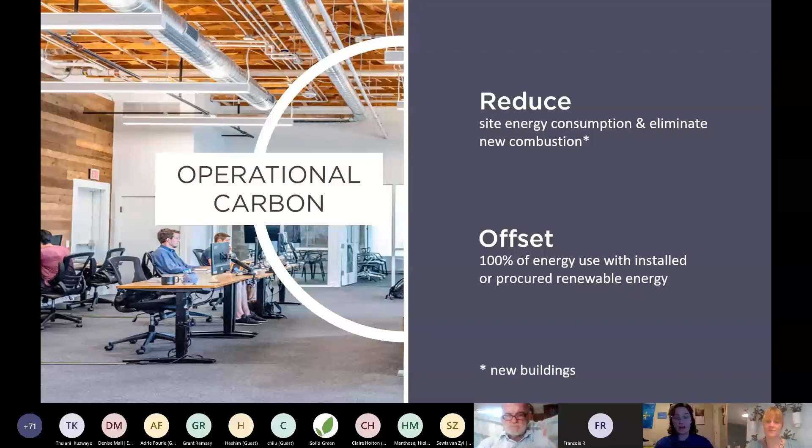And then offsetting, you'll note 100% of energy use with installed renewable energy, so either on or off site. That's a little bit different than LBC as well, because you can look beyond the site of your flower. And then on the embodied side, very similar, reduction in those heavy structural materials. You have to tell us what the total carbon intensity of your project is.

So that is kilograms of CO2 per square meter of your project, because that's a really important metric that we're using to study the impacts of different building types and programming. And then offsetting that with either carbon sequestering materials and/or purchasing carbon offsets.

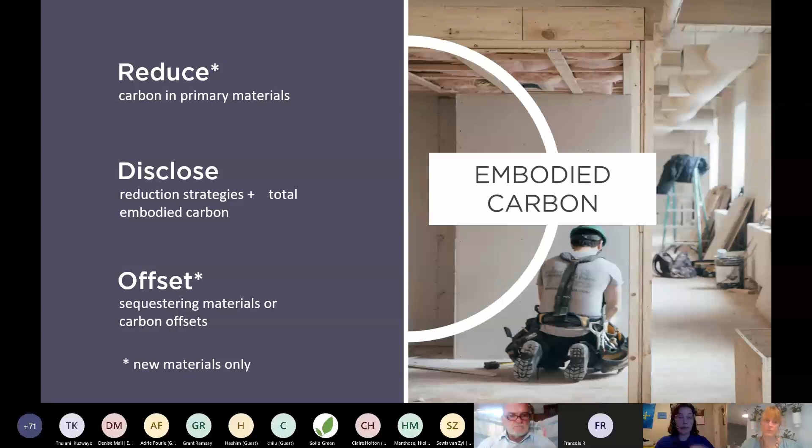Lastly, we have our zero energy program. And this one is very simple. The only requirement here is that you need to be zero energy. We created a really streamlined program for teams who wanted to show that their site energy consumption is equivalent to their on-site renewable generation. So this is also the 100% pathway.

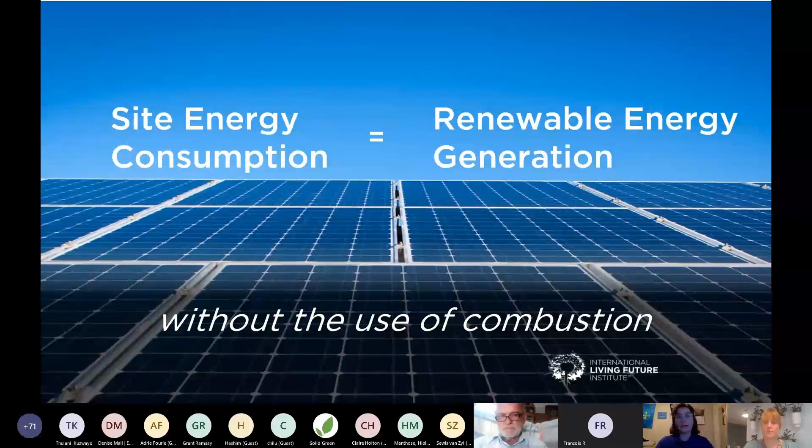So there's no extra buffer there like there is with LBC. And again, without the use of combustion. We're pretty strict with zero energy teams not using combustion, because again, that's a really important part about showing that you can operate fully off of renewable energy.

How the programs interact with each other and overlap is that we saw with net zero, LBC is very net positive, so it goes above and beyond net zero. And so within net zero, zero carbon, you have a little bit more flexibility about being on or off site. Combustion: LBC and zero energy are pretty strict, but there are some pathways within zero carbon. And then for embodied carbon, there's nothing about it in zero energy, but LBC and zero carbon are pretty strict, or pretty inclusive about that.

So now I'm just going to wrap up with a couple of case studies that we really like to share. So unfortunately, the two projects I'm talking about today are in the United States, which means that I need more people like you to do really awesome things in South Africa so that I can have more interesting international projects to talk about. But these are both really cool. I promise they won't disappoint.

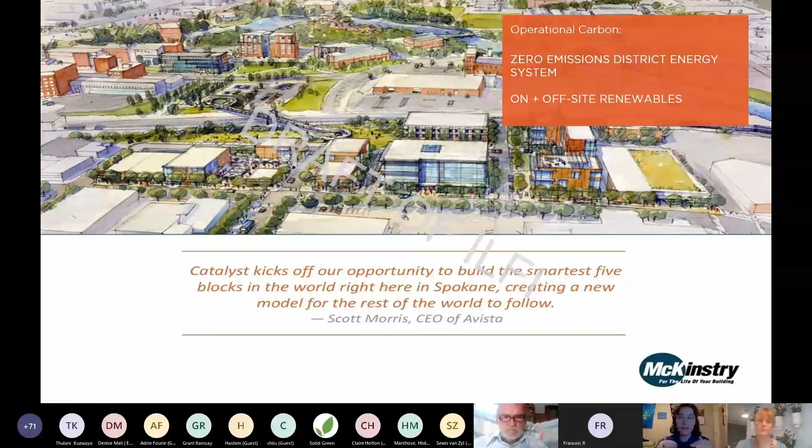So the first project is called Catalyst, and this is a project that's located a little bit east of where I am right now in Eastern Washington. This project is institutional, so it's associated with a few universities that are in the area. And from an operational carbon side, they're actually on a zero emissions district energy system. So they are basically on a fully clean grid that they contribute renewable energy to. And they have some on-site energy on their roof, and then they're also procuring or installing additional off-site solar very near to their site.

And then from an embodied carbon perspective, it's a cross-laminated timber building, which is becoming all the rage in North America. There's a lot of CLT projects happening because we're starting to look really intensely at the impacts of wood and figure out, not all wood is good wood, but figuring out how to use that as a carbon sink within buildings. So they use CLT. They also procured this wood from a local manufacturer, so they really had good interaction with their supply chain and really understood the impacts of the products they were using.

So if you're interested in learning more, a big academic research body we work a lot with is the Carbon Leadership Forum, based out of the University of Washington. They partnered with Katerra, who's the lumber supplier, and they did a full life cycle assessment of this Catalyst building. So that's available on CLF's website if you're interested in learning more.

And then the next case study is called 303 Battery, and this is a multifamily residential project, also here in Washington, about 2 miles, 3 kilometers from where I am currently. So it's right outside of downtown Seattle. This project is really cool for a lot of reasons. They're pursuing the Living Building Challenge Energy Petal, along with zero carbon on a volume scale, which means that they're looking across their portfolio to understand how they can apply these design strategies and set themselves up for certification across a number of different projects. So Sustainable Living Innovations are the masterminds behind this, and this project is extremely energy efficient.

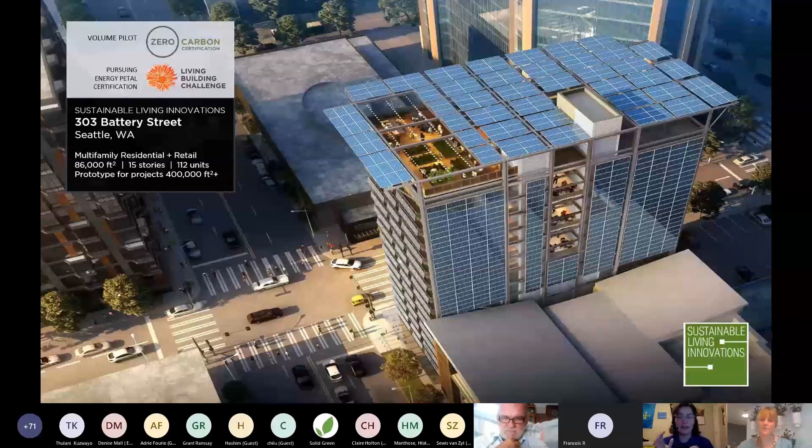And from an embodied carbon perspective, when SLI was created out of another architecture firm in the United States, they asked themselves, how can we build a building that you can construct faster and cheaper, which I feel everyone has probably asked themselves before. And their answer was panelized construction.

So they assemble all of these things offsite in a warehouse and then transport the blocks basically on site and then construct it in a much shorter amount of time, which obviously reduces construction time and waste because it's in a controlled environment. They design everything very meticulously to what they need. This also results in a much lighter project again.

It's about 80% lighter than an equivalent building of its typology, which is really crazy to think about, all of that material that they're not using because of their efficient design and innovative thinking. And they also own or participate in every part of their supply chain, which means that, yes, they've achieved these really impressive reductions from this different design, but they can also iteratively go back and look at every step of their supply chain and reduce the impacts from there as they progress.

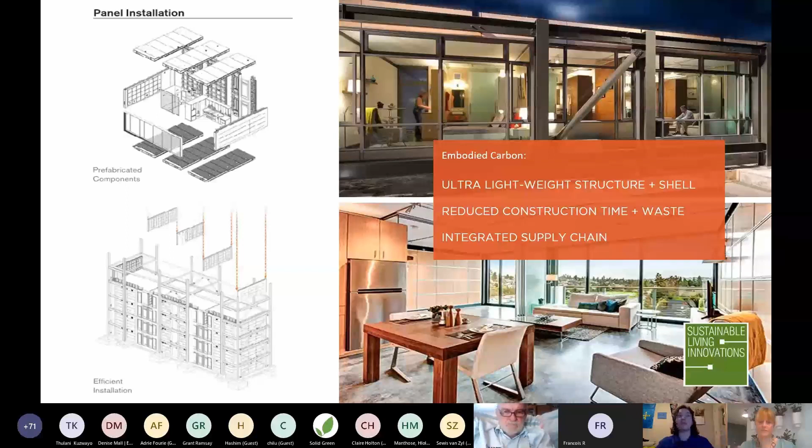And any case studies that have been certified, so these are both projects, the two that I talked about today are pursuing certification. So any of the ones that have been published and have gone through a year of a performance period, since we're outcome-based, are posted on our website there. We have a lot of zero energy case studies available for you to explore there.

And then, like I mentioned, we have our LBC 4.0 standard available, and then our petal handbooks that we just released and updated a couple weeks ago, which is very exciting. I'm most excited personally because I got to work on this: we just released our zero carbon handbook a couple of weeks ago. So this gives project teams in-depth guidance about how to meet those requirements that we talked about today for zero carbon.

And there's a lot of buzz happening with ZC that we're working with right now. Again, it's what I spend most of my time on. And so we're really excited to get that resource out for teams. The standard is available on our website, and then the handbook is available for members through their dashboard.

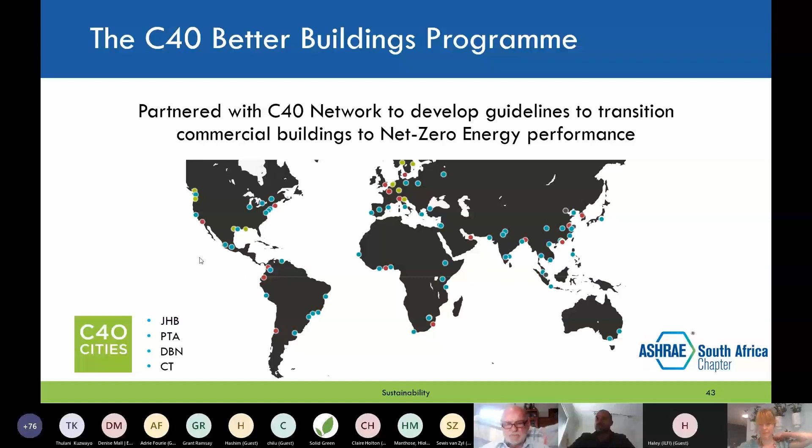Okay, so touching on how do we get there? How do we get to net zero carbon in the South African context? First, I thought I'd talk about a few success factors that come from the ASHRAE Advanced Energy Design Guide for buildings. Number one, I think, is extremely important, is developing culture and mindset in your team for delivering a net zero project. It's that old thing of visualize, manifest. If your team can see this and believe it, they can create it. But if you've got a team that is reluctantly pursuing this, you're kind of doomed from the start. So really important is to create that culture and mindset around it.

And then that team needs to work together. So don't call me up as a developer and say, I need a net zero building. Can you do it for me? Because I can't. And neither can any of the other sustainability consultants out there. It's about having a team deliver this. So every member of the team needs to collaborate to achieving the targets, and it's an iterative process. We'll do concept designs, we'll test them against targets, we'll go back through each stage of the design and refine that. So it has to be collaborative, it has to be iterative.

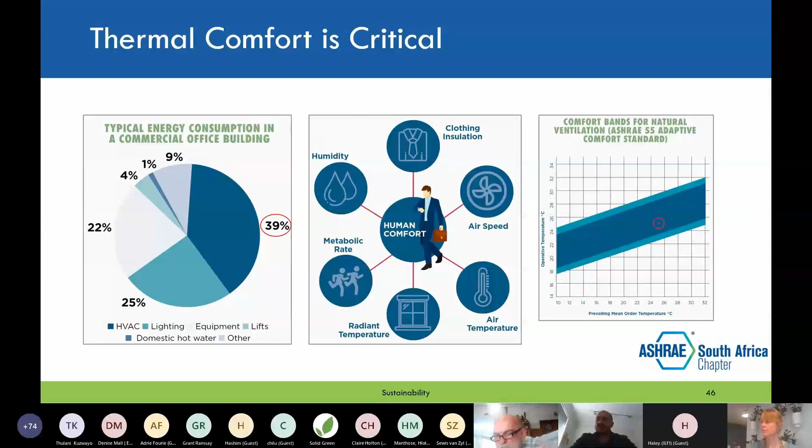Yeah. Touching on from thermal comfort, one of the tools we use to do this is building simulations. And I mentioned that iterative design process where we kind of work collaboratively, test our results, work collaboratively again. Building simulations, if used correctly, can be the central tool that allows us to test those issues. So it allows us not only to model our energy consumption, but it allows us to test things like shading devices, glazing, natural ventilation. We can test these in order to design buildings that are comfortable without air conditioning first. And then in those times where we can't meet comfort, sure, there may be an air conditioning supplement. So that's the goal here, really.

Where, to be honest, at the moment, we design our buildings, and then we design the air conditioning to meet whatever that design is. And very few projects in South Africa have managed to really move into this iterative space of using simulations to inform excellent design. And if we're going to move to net zero, we need to all move in this direction. It can also be useful for daylighting, for glare, not only thermal comfort.

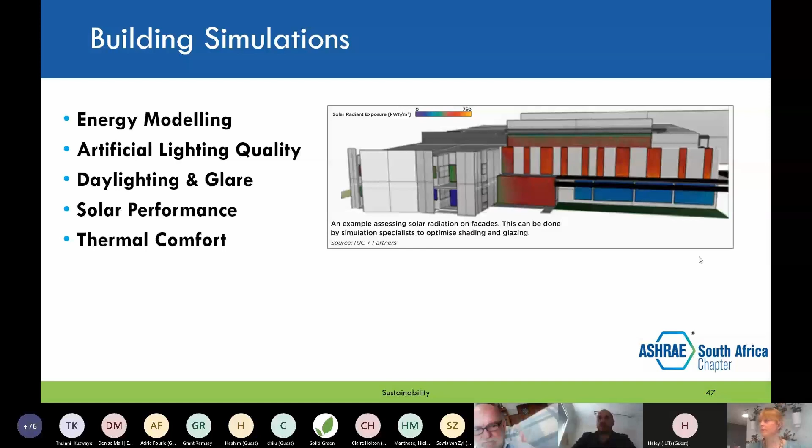So moving ahead, another useful tool. So we've spoken about the ASHRAE 55 standard, and there's a number of other ASHRAE standards out there relating to simulations, relating to thermal comfort. And then we've spoken about simulations and those tools. So the question is, can we achieve buildings that are comfortable in the South African context?

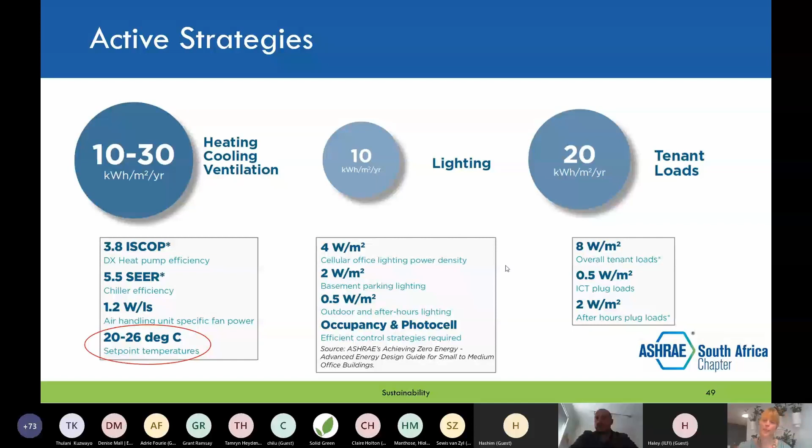Similarly with lighting, we first go through the exercise of maximizing daylight, maximizing natural light in buildings, and then we apply the most efficient technology. Lastly, we look at plug loads and work with tenants through mechanisms like a green lease, for example, or through fit-out criteria. We can keep the plug loads as low as we can as well.

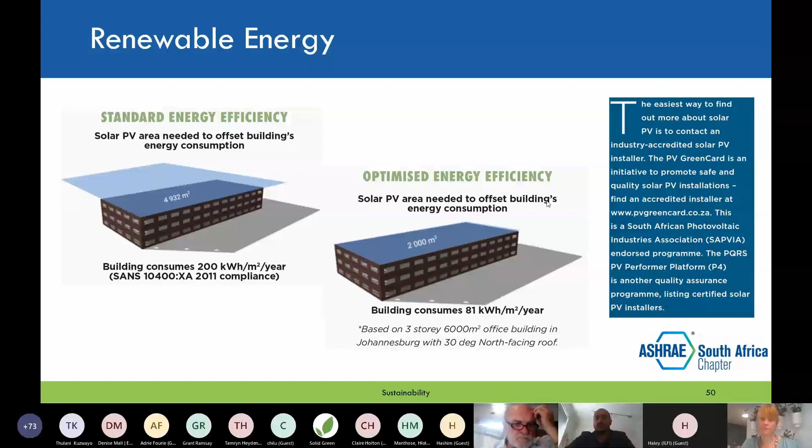Okay, so that's really me for this presentation. But in conclusion, just a reminder of a couple of the points we want to get across. The one is that net zero energy buildings are possible, and not only that, are necessary, but we have to drastically push to lower our energy consumption first. We have to push for comfortable buildings that reduce the reliance on energy-intensive air conditioning. And then once we're done with that, the technology's there and ready and affordable, and we can supplement the rest.

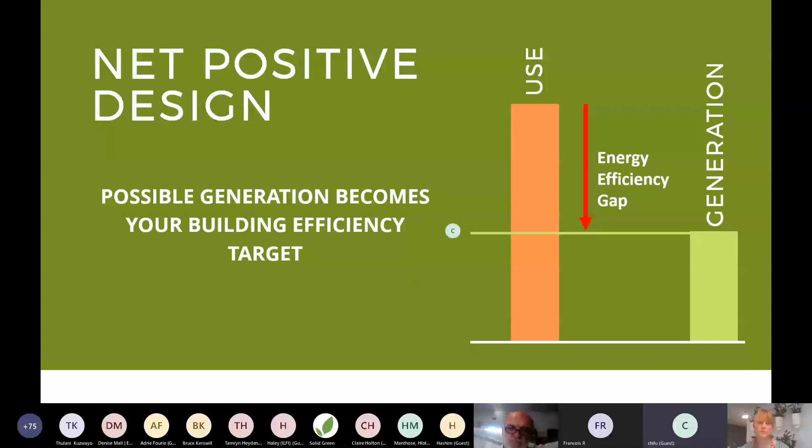And to get an idea of this energy efficiency gap, I think people kind of understand that, yes, maybe the buildings are not that efficient, but how much more efficient than the building that we know do we have to be? So this graph is indicative. There are no numbers on this because it's just meant to be a visual representation of just how efficient your building needs to be.

Net positive or net zero carbon buildings are about energy efficiency. They're not about your eventual offset. If you went through this whole process and eventually didn't do the offset, you would still end up with the most energy efficient building that you've ever worked on.

What we often say to people at the beginning of projects is that if you work on your first net zero or net positive building and something doesn't happen that makes you uncomfortable, then you're probably not on the right track, because everything that's in there has to be things that we've all never done before.

A lot of what we'll be talking about now is just the reality of net positive energy buildings as per our experience. It is still fairly limited in comparison to the overall number of buildings. This represents the smallest amount of the work that we have, but it's of course the most challenging and the most interesting. We've got 3 buildings that we're working on that are aiming to be net positive. They're quite different. One is an office block, one is a residential home in Cape Town, and one is a hotel.

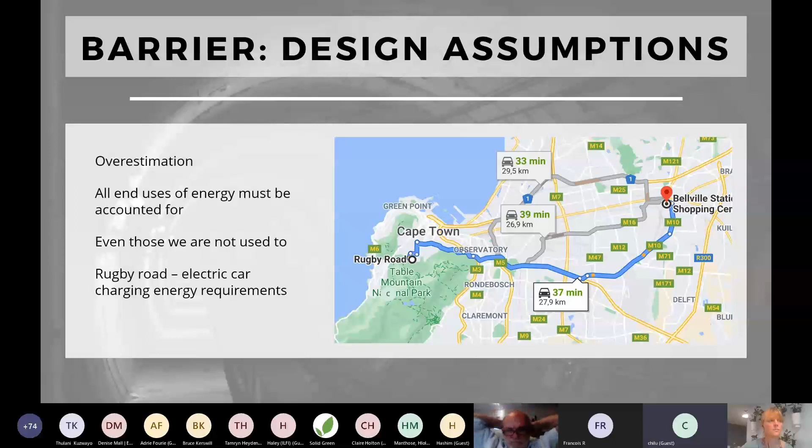So once you're trying to account for every single piece of energy within any type of building, there's going to be a lot of this, because you have to make assumptions upfront and see how they carry through. And this is why within the Living Building Challenge, there's a lot of emphasis on data and monitoring your usage, because once you start to see how buildings operate, that's the best input into design, where you can see what actually happened in certain places.

So when we're talking about buildings that are 3 to 4 times more energy efficient than before, what are we really looking at in terms of what we need to optimize and reduce? And if we look at buildings over the last sort of 20 to 30 years, there's some aspects of buildings that have just naturally policed themselves. So lights have just become more and more efficient. You can't not get an LED light in a new building. A lot of equipment, Energy Star, people use laptops. A lot of those have generally just been decreasing.

Air conditioning, on the other hand, as a technology, has not advanced very far in the last 30 years, because the principles are still the same. The equipment might be slightly different, and there might be slight changes in efficiency, but in general, we cool with air. We've been cooling with air for the last 40 years, even though science tells us that's not the best way to keep a human being comfortable. That, coupled with the way we design buildings nowadays, means that whatever advances have happened in the technology, the design of buildings is such that the impact of heating and cooling hasn't changed that much over the years.

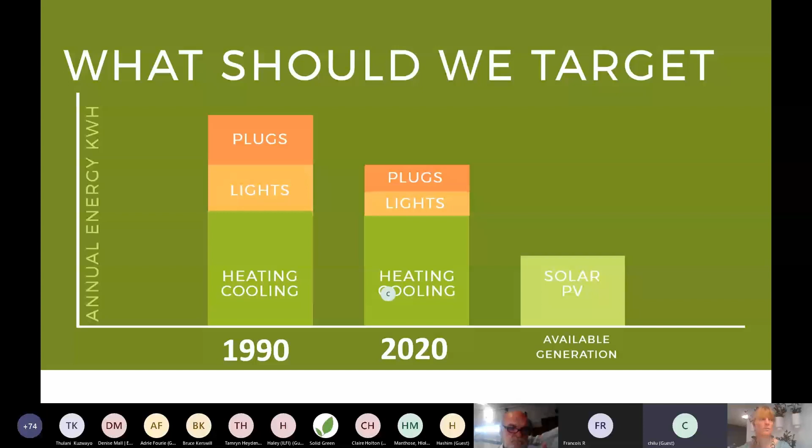So the biggest design impact for net positive buildings is how many hours a year can your building run without your air conditioning? And it's a little bit different to thinking about it from a natural ventilation perspective, where you say, this is what the climate allows you to do. So if you're working on a building right now and you had to run a simulation and say, if at 12 o'clock, when it's 23 degrees outside, your air conditioning broke, how long would it take before it was 30 degrees inside and you had to evacuate everyone? And that's the biggest design impact.

So we're trying to get this going as a metric that we use to evaluate buildings, which is designed without air conditioning, and look at, even if you do have a system, can it be off? Because the only way you can make this type of impact over a building's energy use is by having hours where your air conditioning is off. You know, the best efficiency is off. People often will look at a building and say, well, what technology is in there? And you have to look at what is the actual requirement. So a key takeaway from this would be just that. Can you survive in your building without air conditioning, and for how long?

So that goes into the topic of aligning with natural forces. So here we're living in Africa, where we know that we have this amazing resource in the sun in terms of just how much energy intensity we get. But the fact that our energy intensity is 40 to 50% higher than anywhere else in the world means that the architecture and the way that we design our buildings has to be suited.

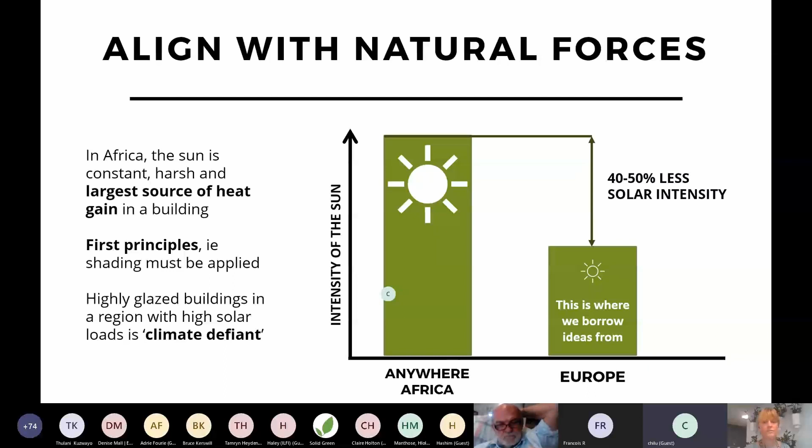And a lot of times, if you take a drive around a lot of the central business district areas across almost any city in South Africa, you can see the type of buildings that are very climate defiant. They're not suited for where they are, where we know we've got high solar gains, and we have these buildings that are incredibly highly glazed, and we also have buildings which are even more incredibly budget conscious. So all of it comes into a scenario where we are completely defiant with the climate that we have. So this is the first aspect of aligning with natural forces. We need to design for the climate that we are in. And the first one, doesn't matter where you are in Africa, solar intensity is very, very high.

So these are two images of the two buildings that have a good example of this. So the one on the left is 76 Corlett. It's a building that's well shaded. It actually defies a lot of what we would understand around sustainable buildings, in that it's oriented east-west. And what we always say is that there's no real wrong orientation if you provide the mitigation.

So if you design your building to account for the fact that it's oriented in a way that's less than ideal, what there is, is that there are facades that are more difficult to shade than others. So that's why you talk about north-south, because it's very easy to shade those. East-west is difficult to shade, but it's not impossible. The Hotel Nieu on the right-hand side is the same. It's a good example of designing for the climate that we have here, protecting the facades against direct sunlight.

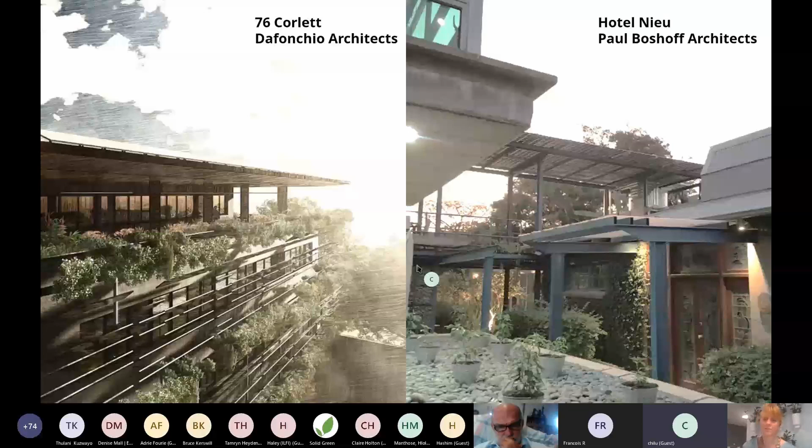And then the second aspect of aligning with natural forces is looking at what is the outdoor condition. The bulk of South Africa actually has what we would consider mild climates statistically. So, for example, the average temperature in Johannesburg is 17 degrees, which means across the whole year, you need heating more than you need cooling. But we always say that it's a cooling-dominated area, and that's only because of the way that we design.

So if your building is in a mild climate, you should take advantage of prevailing conditions to run buildings at a minimum just based on what you need for ventilation. And not forgetting that it actually does get cold. Even though we're in Africa, a lot of times we build buildings forgetting that it gets cold.

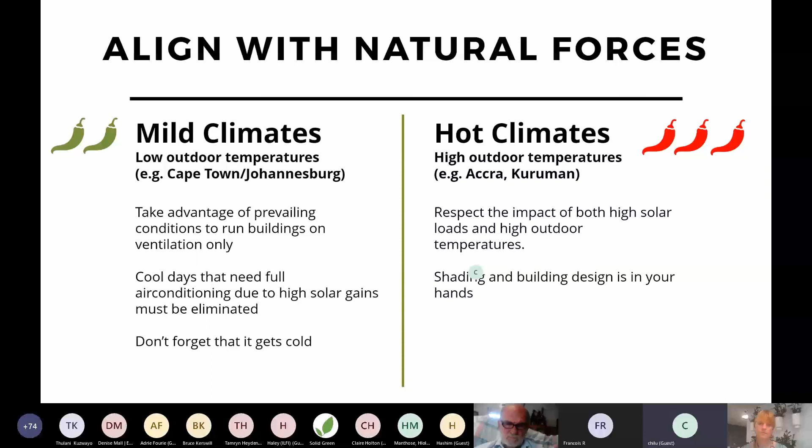And then when you're in a hot climate, you have to respect the fact that the combination of hot outdoor plus high solar gain means a lot of energy to keep buildings comfortable. So it's even more imperative that you shade the building and you make sure that you design correctly. As much as the climate is not something that we can control, the shading in the building design is definitely something that can be controlled.

When you are in a very mild climate and you've got outdoor temperature that makes it possible for you to cool the building, one of the constraints is that the air conditioning, which is providing cooling, and the ventilation system are often mixing and working together. So if you decouple this, which means you can have your cooling off but have your fresh air working, then you can provide comfort, you can provide a source of cooling without running the big equipment, your compressors and that sort of thing.

And that's the 82% in a climate like Johannesburg that Francois was talking about: if you can get air from outside into the building reliably for 82% of the time, you won't need your big air conditioning devices.

Malus helped me with these slides, and I'm thoroughly impressed with this fresh air fan that's actually rotating.

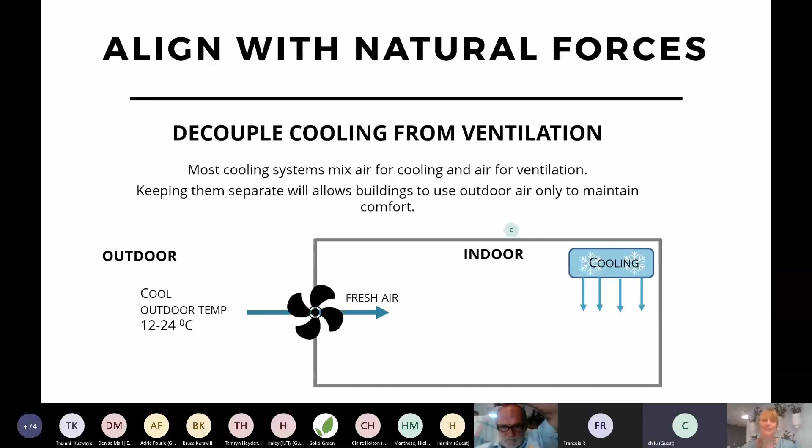And this is a learning that we had on 78 Corlett, which is the building that we worked on with the same architects, that we're trying to implement on 76 Corlett, where you could see that the bulk of the time, the solar loads are being so well controlled that if we could just get air in, but not have to run it through the normal fresh air system, it would actually be comfortable for the bulk of the time. And I think this is something that we all sort of intuitively know, because if you're at your house and you're working, you open the window, and for the bulk of the time, you're not sitting there and it's 35 degrees or whatever the case is.

And one of the big factors that people always talk about when we're talking about facades is single versus double glazing and looking at how it impacts energy. And how we try to explain it now is that your building fabric is about comfort. So if you can put something in that is going to stop someone from turning on a heater or turning on an aircon, keeping them comfortable, that's where the energy saving is going to come from. So you can run a simulation that will show you that between single and double glazing, you're not getting enough of a saving to justify the cost, perhaps.

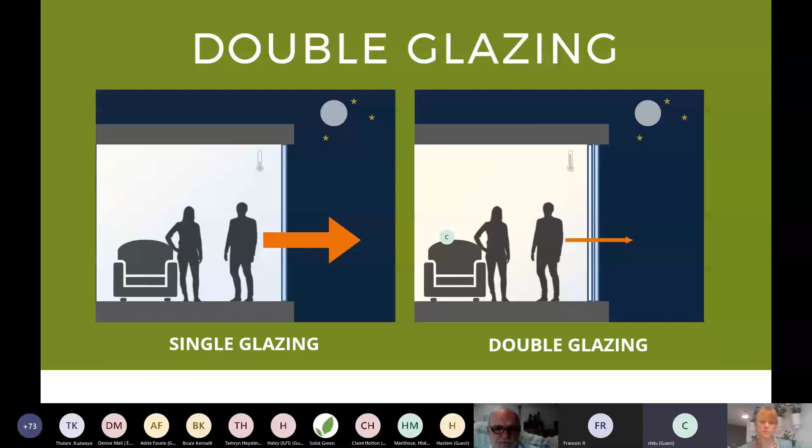But what it does show you is just how much more comfortable, and that's something that you can't do in a simulation model where you account for the fact that the human behavior, that even if you've designed a system for 22 degrees, if your facade has been designed well and it's 24, 25, a person will not need to have air conditioning. And very often, if we look at that aspect in terms of single versus double glazing, looking at it as how much more do you improve comfort, and that has a knock-on effect on energy.

We always talk about target-driven design, if you've worked with Solid Green on a project, target-driven design or process-driven design. And one of the key aspects that's always been missing in this whole process is a target that is stringent enough to actually allow the integrated design process. So what we often find is that we do try to run projects through an integrated design process, but if your target is not stringent enough, then it doesn't force the change.

If you design a net positive building, before your offset of energy, it will cost you less than a normal building, because you just cannot design it the way you always used to design it and have all the aspects of buildings that cost money. You're not going to have the massive glazed facades with the massive air conditioning plants, and that's generally where a lot of cost comes from. If you're designing from first principles, you have to eliminate all of that, and there's a significant cost that is linked to those elements. So outside of your offset, if there are any questions, I haven't looked in the chat.

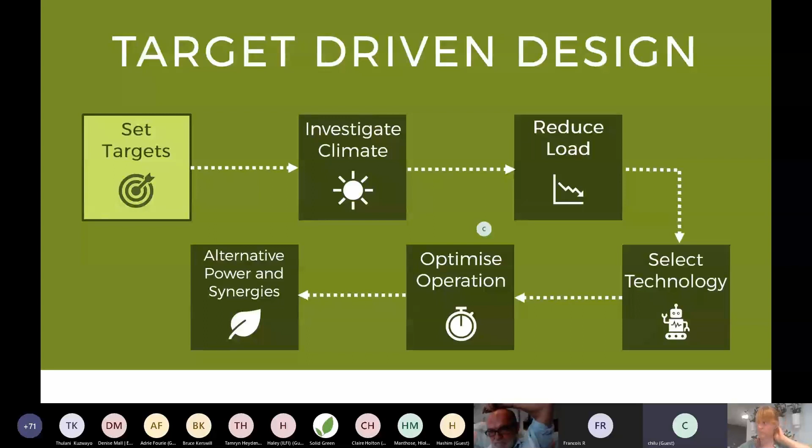If someone asks how much does a net positive building cost you, before you have the offset, it should save you money. It has to save you money relative to the way that buildings are normally designed. And once we remove some of these barriers and we redefine new normals, we will start to see this change in buildings, and everybody's going to be doing it. With the coronavirus, we've all been talking about herd immunity, and there's also such a thing as herd mentality as well, where once it's done, others will follow in quick succession.

The first Green Star rated building was in 2008, 2009, and now there are over 350 buildings, because at the time it was that we couldn't do green buildings, and now green buildings for many people are done pretty much in their sleep. And now we have to look at what the next frontier is. And a lot of the reason why is that, especially on the African continent, there's a lot of benefit for us in making all of this work. We're starting to develop our economies at a time when the climate is extremely constrained. So a lot of climate change mitigation is falling on us, because we are going to do the most building in the next couple of years.

But we also have an issue in that it doesn't matter where on the African continent you go, whether it is in Southern Africa, South Africa, Botswana, Zambia, East Africa, West Africa, there's always a problem of energy generation. There's a need for development, and there are constrained grids across the entire continent. And we are building buildings that require a lot of energy. So it's all very counterintuitive. So if we look at the number of buildings we can currently power, relative to the fact that we have got this infinite source of energy, the only difference is that we haven't quite figured out how we could design buildings that meet our requirements and also can be powered completely by the sun.